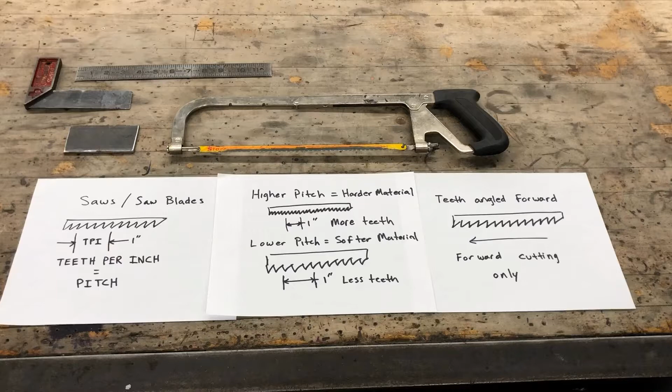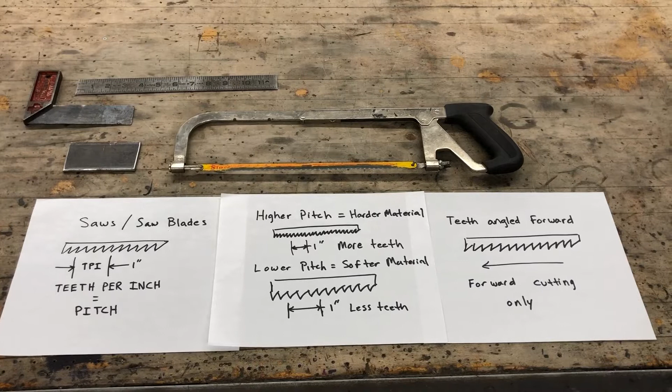Okay, today I'm going to talk about saws, saw blades, how they work, and cutting some pieces of metal so that you can fit up and just practice some stick welding before you actually take on a project of welding.

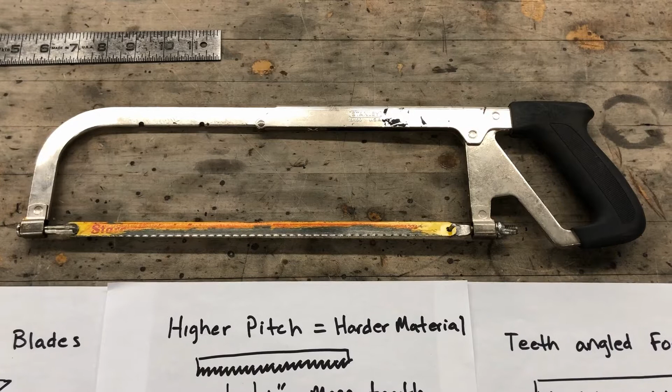First things first, this is a hacksaw. Hacksaws are designed to cut metal, and the reason why is because metal is a much harder material than most other common uses for saws, like wood.

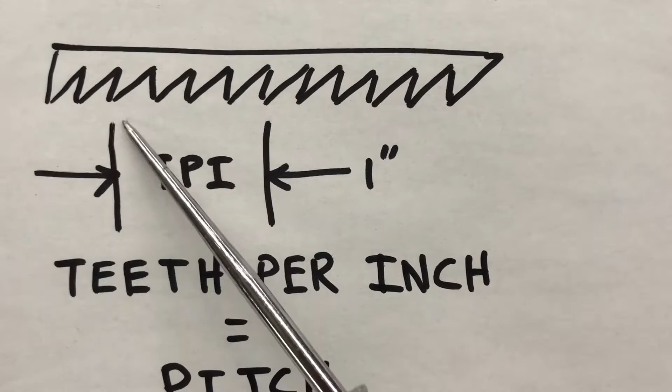Saws and saw blades have what's called pitch. The pitch is the amount of teeth over 1 inch. So it's called TPI, or teeth per inch. So the pitch is determined by how many teeth are over 1 inch. Teeth per inch equals the pitch. TPI equals teeth per inch.

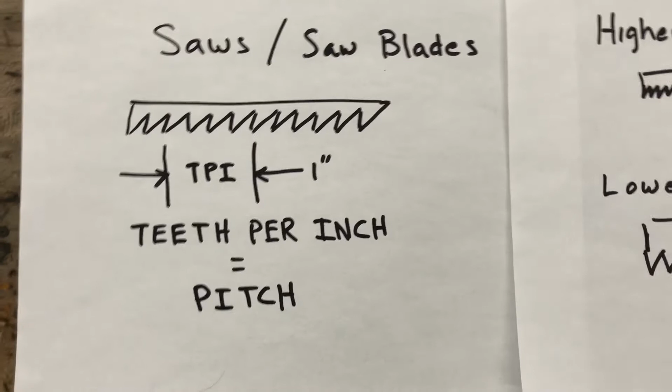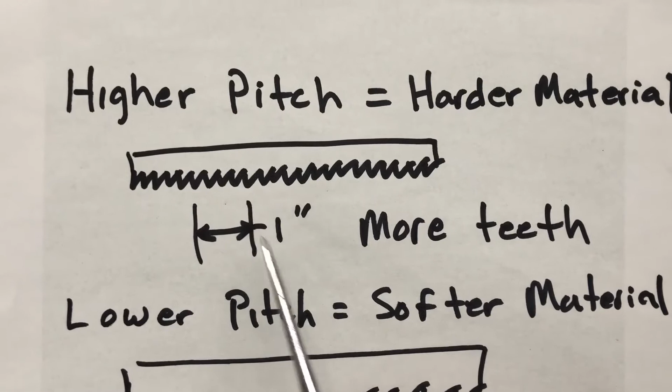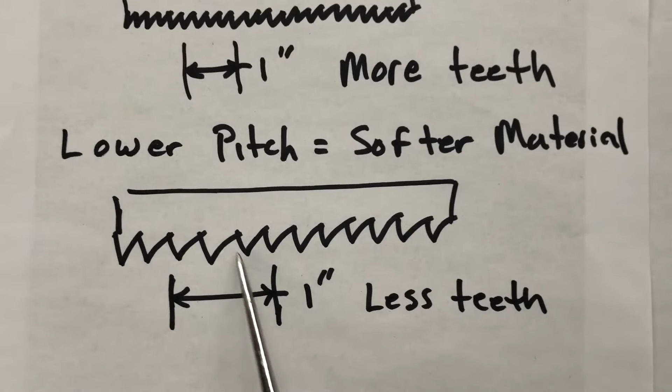So on wood saws, the pitch is much lower than it is on metal saws. So the higher the pitch, the harder the material. So here it shows there's many more teeth over that 1 inch. More teeth over 1 inch equals a higher pitch. Whereas a lower pitch you would use for softer materials, and there's less teeth over 1 inch.

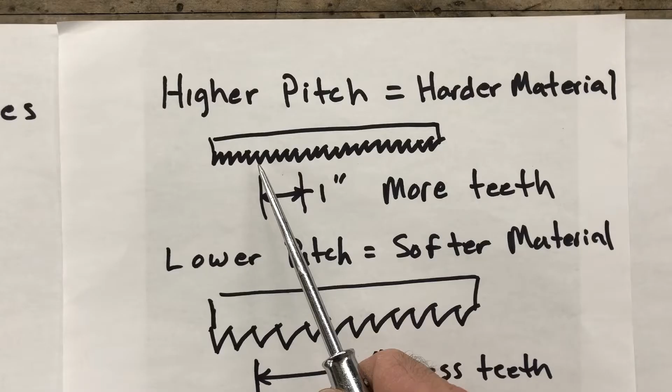The reason why is because with the harder material, you're taking much smaller cuts. Even though they're smaller, you're making many more at one time. Whereas a lower pitch with less teeth would be used for wood, because it can rip through the material much easier than a harder material. Now you could use the higher pitch on the softer material. It doesn't make much sense because it would take you much longer as you're taking smaller cuts.

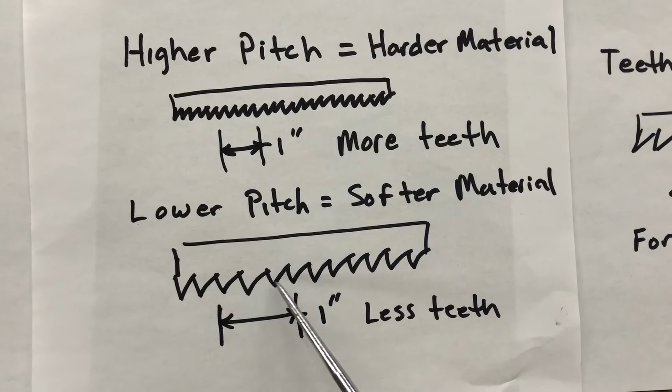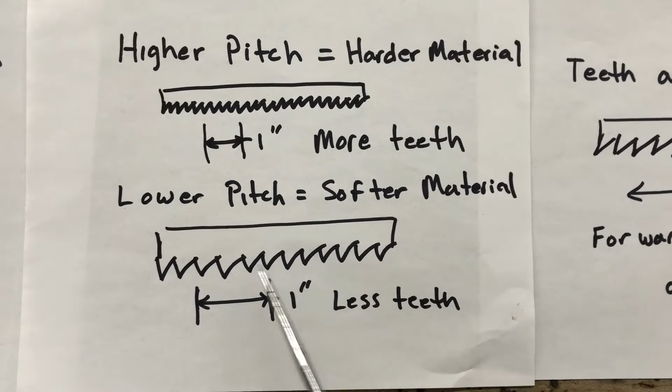You cannot, however, use a lower pitch on a harder material, because the size of the teeth will not let you make a cut in the harder material. The material would end up just getting caught inside those large gaps, like a wood saw on metal. You wouldn't be able to use it. So they designed these saw blades with larger teeth to cut wood and smaller teeth to cut metal.

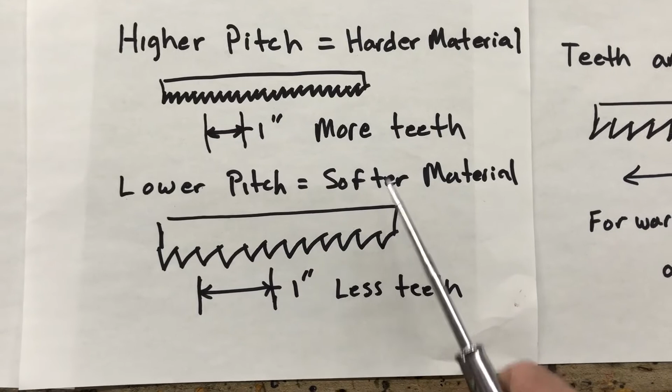Higher pitch, harder material. More teeth, harder material, higher pitch. Less teeth, lower pitch, softer material. And the pitch is teeth per inch.

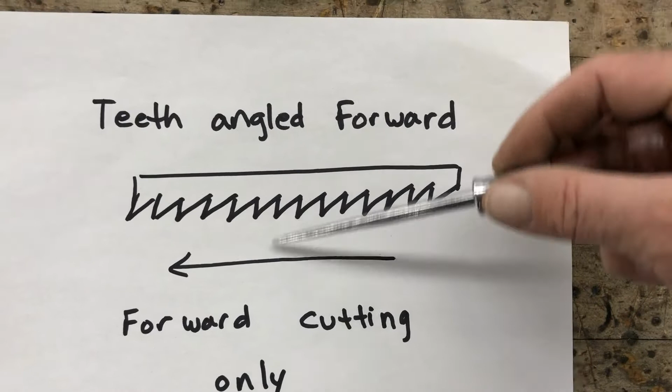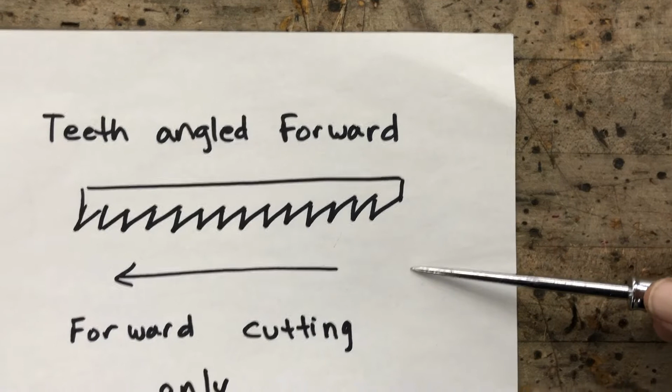Teeth per inch. The teeth on saw blades are angled forward. So the angle on these teeth makes it so that you can only cut in one direction. This would not cut going that direction. So these little blades are actually digging into the metal or whatever material you're cutting as you're pushing forward. When you draw the saw back, it's just to get a new location for another push forward. Then you would almost lift up and pull back and then push forward again.

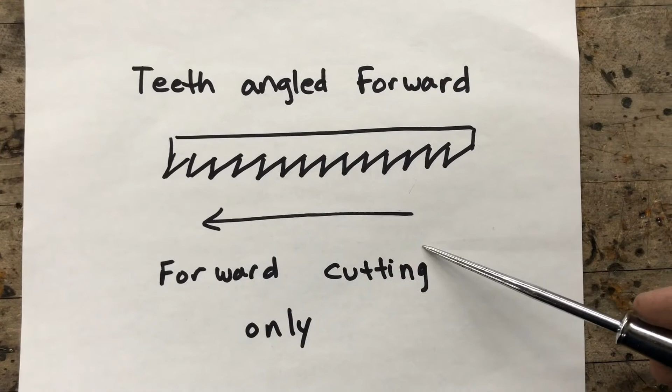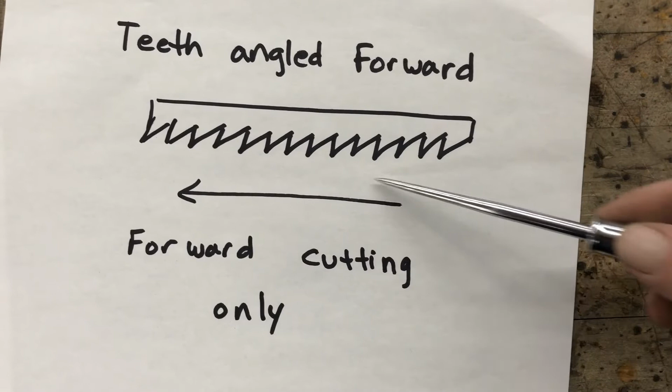Mechanical equipment like bandsaws and things, all the teeth are angled forward also, and the blade just keeps spinning around. So it's always going in one direction, and it's always cutting on that forward movement.

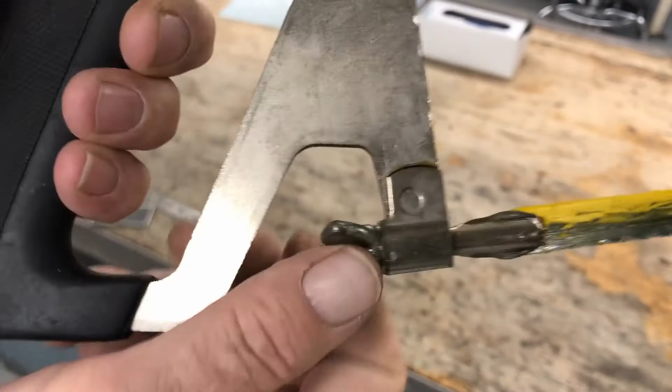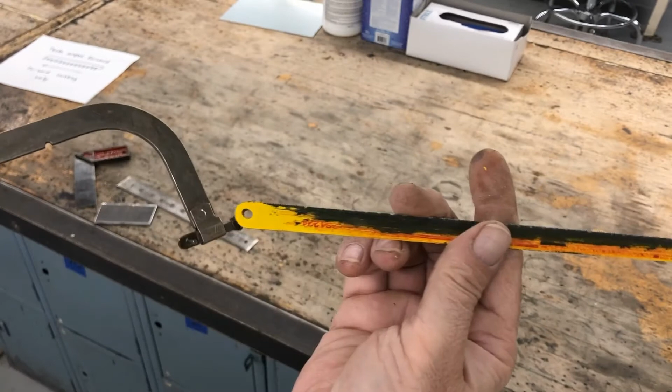On the back of where the blade is, there's just a little wing nut there, and you loosen it and turn it to the left, lefty-loosey, and this post that's attached to the blade will just start to loosen up and move forward. That's how you loosen the blade. So you just keep turning it until that screw moves out. And then when it's loose enough, the blade will come right off. Then you just take it off on that side as well. And that's how you remove the blade.

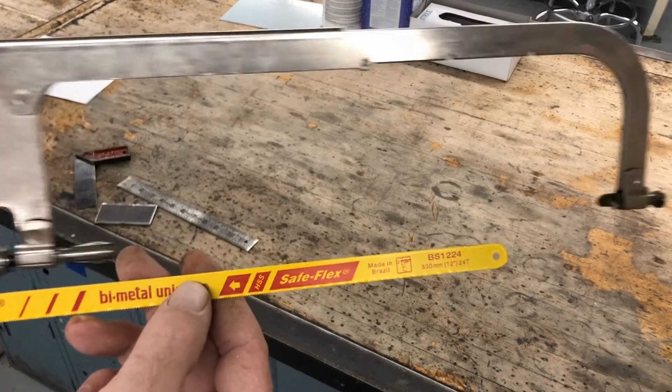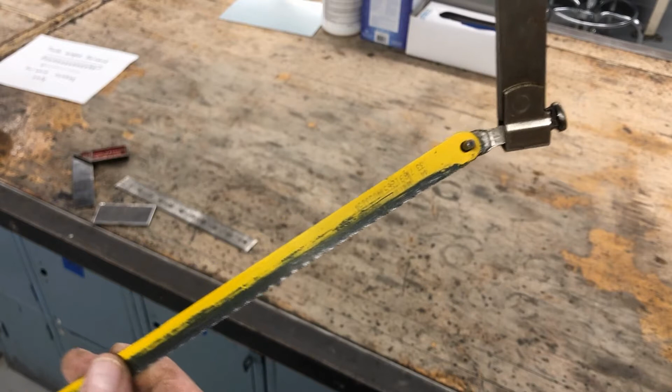So when you're ready to put a new blade on, it's the same thing. Look for the arrow. See the arrow? So this would be the wrong way to put it on, because the arrow means it cuts in this direction. And the saw works in this direction. So I have to make sure that this blade goes on this way. So you put the little hole over the hook at the front. Make sure that the screw part is pushed all the way forward.

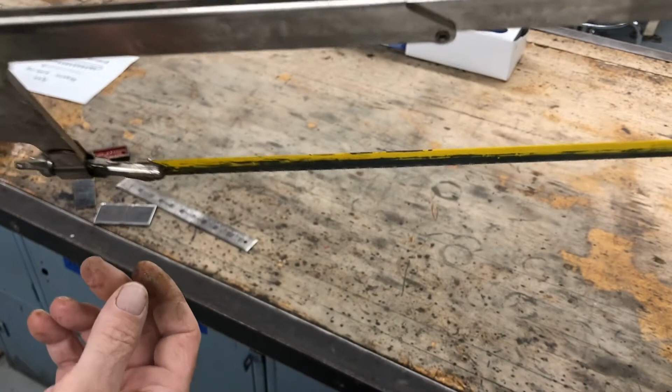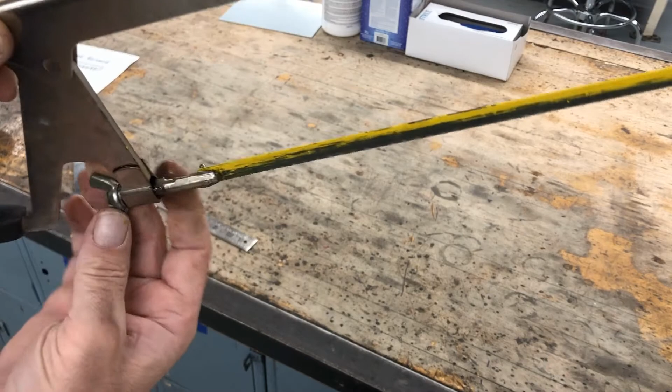Once you have both ends hooked, just start tightening. And it will draw together and start getting tight. And you want it pretty tight so it doesn't move around while you're cutting. Just get it as tight as you can get it by hand.

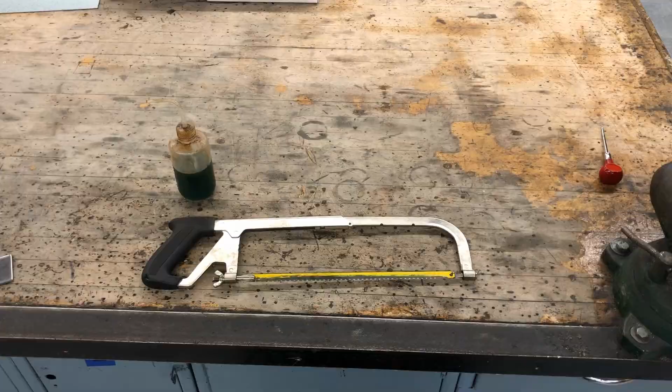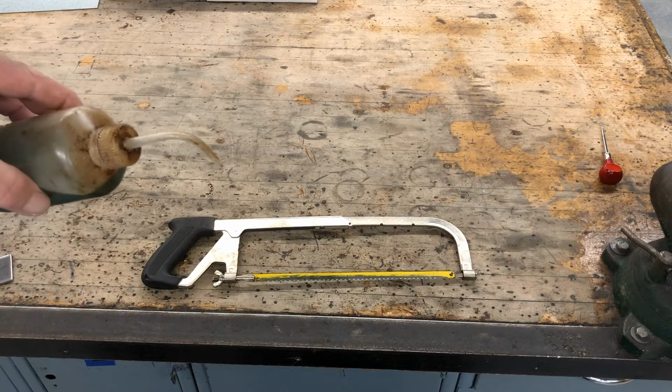When you're cutting metal with a saw, the friction between the two pieces of metal, the blade and the piece you're cutting, that's also not good for the cut or the saw. So we have to put some kind of lubrication on the blade to reduce the friction and the heat buildup. So I have what's called cutting fluid. This is just a synthetic oil type stuff that's in a squeeze tube. And you have to tilt this. So you can see, all you do is squeeze and the fluid comes out of the tube.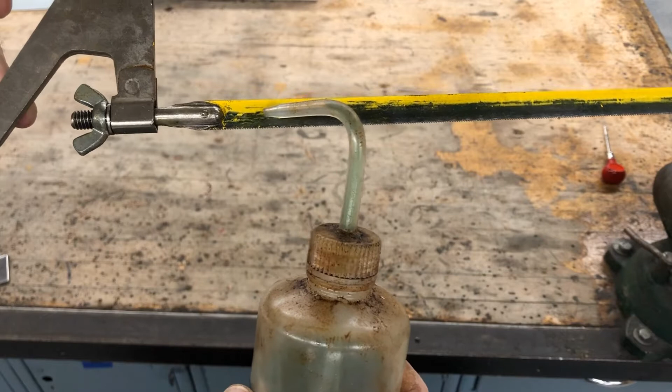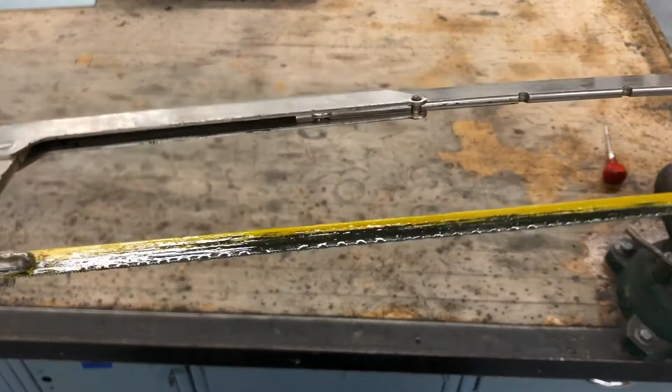Now you don't need a lot of this stuff. You just really want to put it on the blade a little bit. Just like that. And you don't want it laying on there that much, so you can just wipe it a little. Don't wipe it all off. And then you can wipe the other side too, to put some on both sides. And as long as it looks wet, it's good. It shouldn't be dripping. It should just have a little coat of oil on it. That's all. And then you're ready to cut.

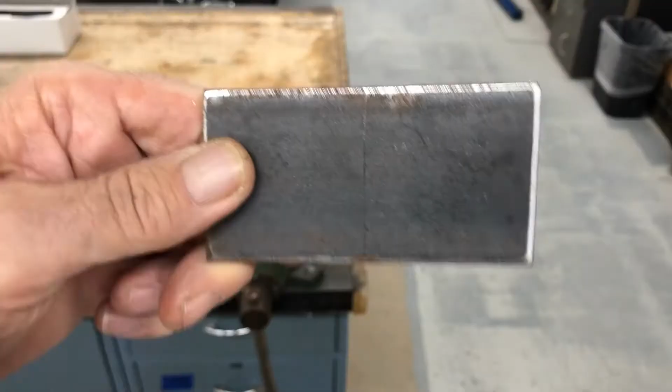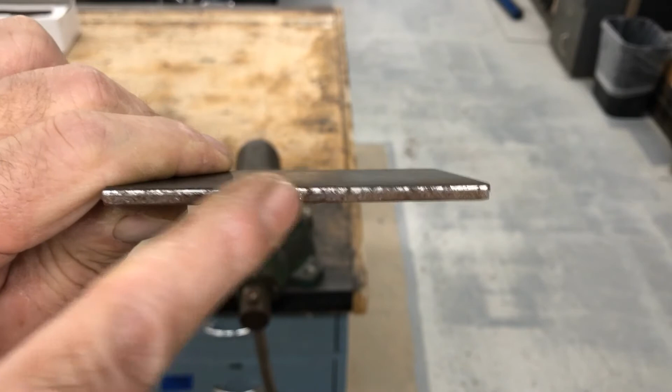So I just got myself a square piece of metal, measured out half the distance, scribed the line, and I'm gonna cut right down here with the hacksaw. And then I turned it up and made a scratch at the top on this edge, because this is the edge I'm actually going to be starting my cut on. So if you follow it up, there's a scratch at the top so I can identify where to start my blade.

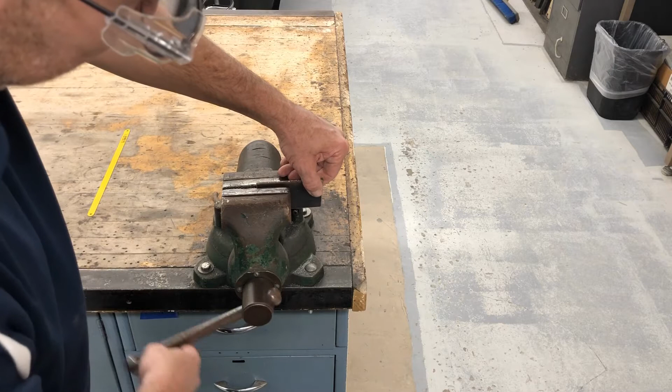Whenever you put metal in a vise and you're going to be cutting it, where you cut needs to be close to the vise. As close to the vise as you can get it, without the saw interrupting, because you don't want the saw to hit the vise and throw you off. So I would want to cut about there.

Little bit away, not right on the vise, but just like maybe a ½ inch out. You don't want your piece of metal in the vise like this and be cutting out here. The reason is, the further away you are from the vise, the less rigid it is in the vise. And it creates a lot more vibration or chatter.

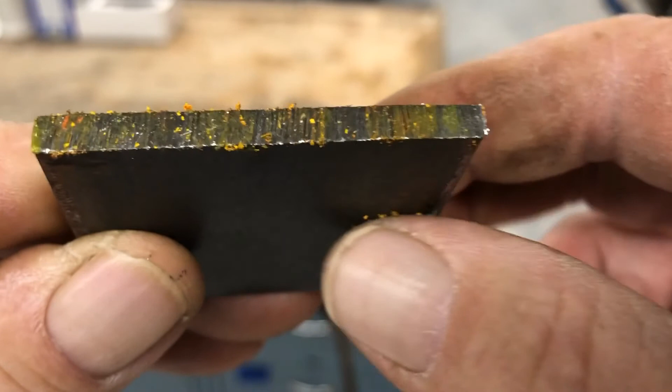Loosen the vise, take your scrap piece out, or your good piece, however it is that we're looking at it. And now once you're done cutting, there are heavy burrs on the edges of this metal, so be careful. There's heavy burrs all the way on both sides of the metal now that can cut you or get splinters in you, so be careful.